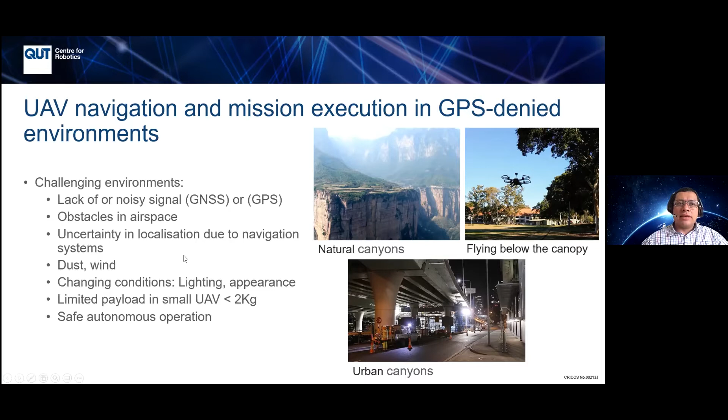So the proposed framework consists of hardware and software. So hardware, we have built multiple prototypes, which are based on a quadrotor frame. We also put an onboard computer and visual inertial sensors so that the UAV is able to localize in a GPS denied environment. Also, it's worth mentioning that we're aiming to build a sub 2 kilogram UAV,

because the sub 2 kilogram UAVs are within the very small RPA category, or the excluded category for CASA. CASA is the Civil Aviation Safety Authority in Australia, and they regulate the use of remotely piloted aircraft. So if you're using an aircraft which is under 2 kilograms, this falls under the excluded category, and it has some advantages, like, for example, not needing to get a remote pilot license, but you still have to comply with some regulations, like for example, registering your drone and registering yourself.

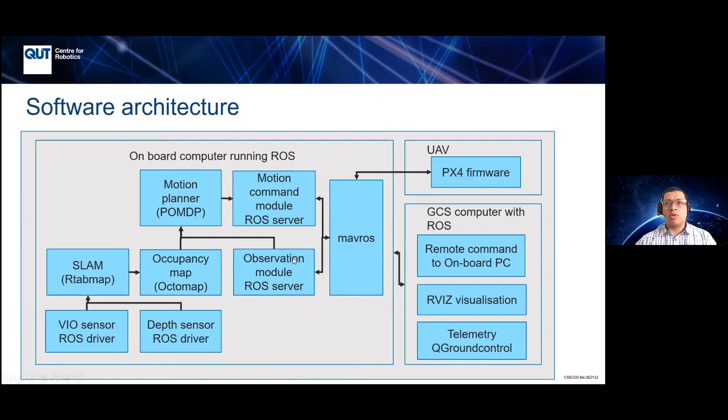So a good thing to mention here is that we're relying on an onboard computer for executing the mission, because if at any point in time we lost a connection, there's still the safety of running this modular system on board the computer and on board the UAV.

In order to develop this system, we need to start by testing first the localization of the system. So we use a Visual Inertial Odometry algorithm for this. And we start testing in an indoor environment. So QUT has a flight arena, a flight testing facility that allows us to test UAVs in a netted area, and also we have a motion capture system.

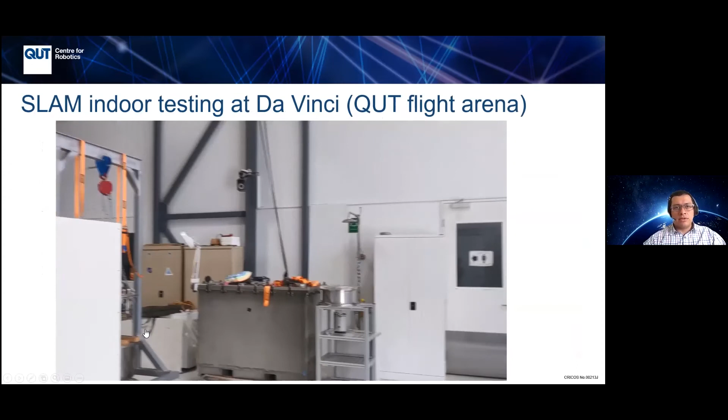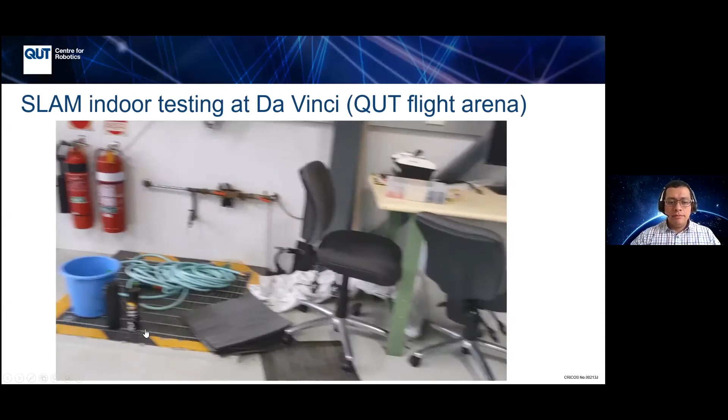Then the next test is to show how the map is built. So this is the place where we are building a map. So in this test, we're just doing a handheld mapping. And we're visualizing how the system is building that map.

In this visualization, this is fast forward. We're holding the UAV with our hands and mapping around. What you see there is just a 2D projection of the 3D occupancy. This is an occupancy grid. And you will see that at the end also, once it closes the loop, the algorithm does some corrections and it adjusts the map.

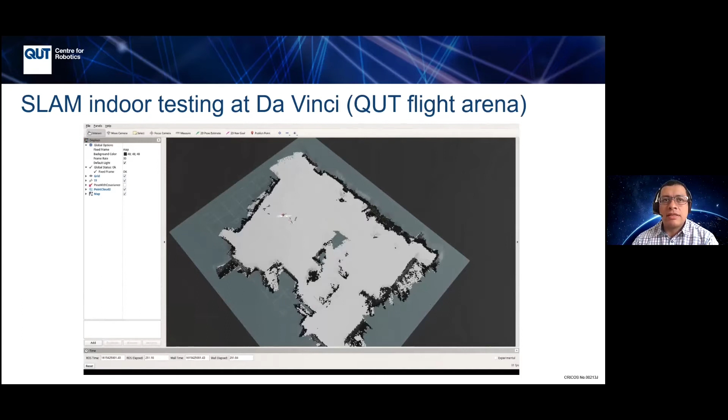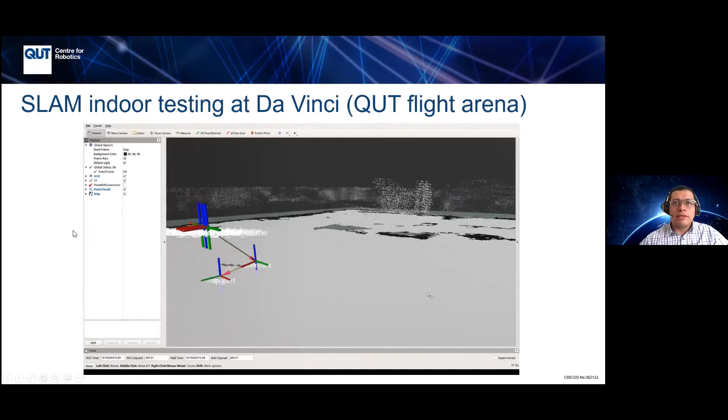So you see that it's adjusting the map. So we finished the mapping, but it's finding new loop closures. And you will see here the point cloud that is generated for the octomap, for the occupancy map as well, and the frames for the UAV, for the whole system, the important frames. So with this occupancy map, we can now generate a mission and also fly safely.

We have been testing, so QUT has a property which is called the Samford Ecological Research Facility. This allows us to test the system in an outdoor environment. So the idea of testing this is also for obstacle avoidance, for avoiding trees. So this also comes from the goal of the project, of an ARC Discovery project, which is to navigate safely below the canopy.

SERF is a place that is close to Brisbane city, but it requires planning. So you have to book the place for flight testing. You have to request permission to do flight operations. You have to submit a flight plan. There should be maps, a risk assessment also that needs to be approved before flying. It also requires logistics, booking or renting a QUT car, packing it up, loading, gazebo or marquee, table, chairs, and generator.

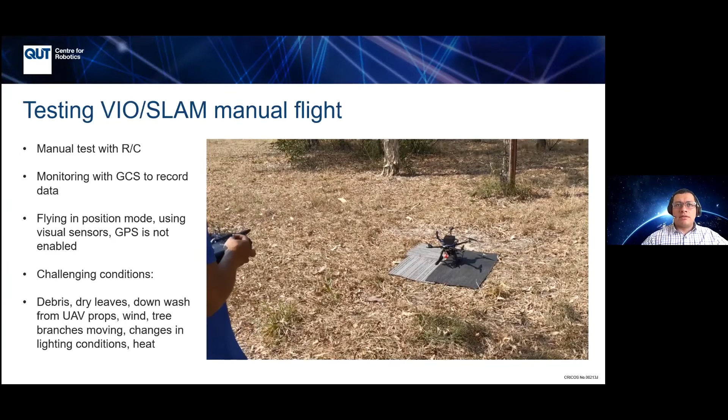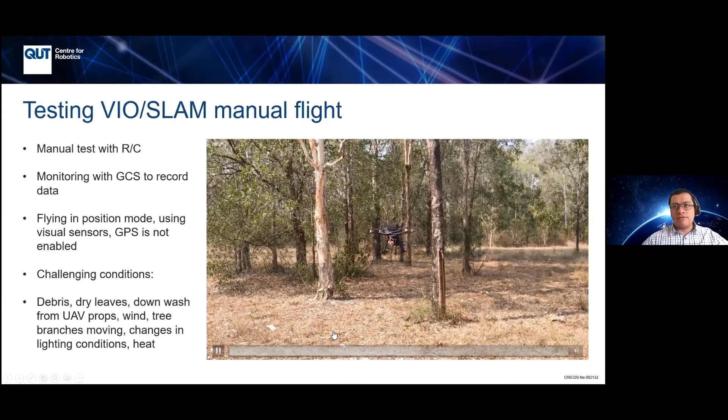And you will see that we have some challenging conditions. So in this case, there was a drought, and you will see a lot of debris and dry leaves, and there is downwash from the UAV. So sometimes this affects a lot. Basically it comes in front of the camera that is used for SLAM, and it affects a lot the performance of the SLAM algorithm.

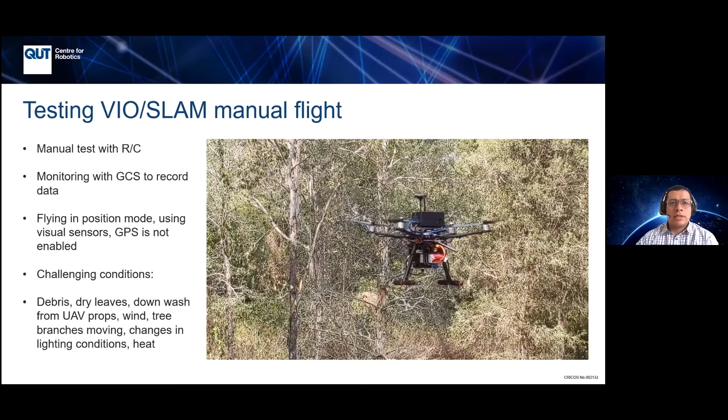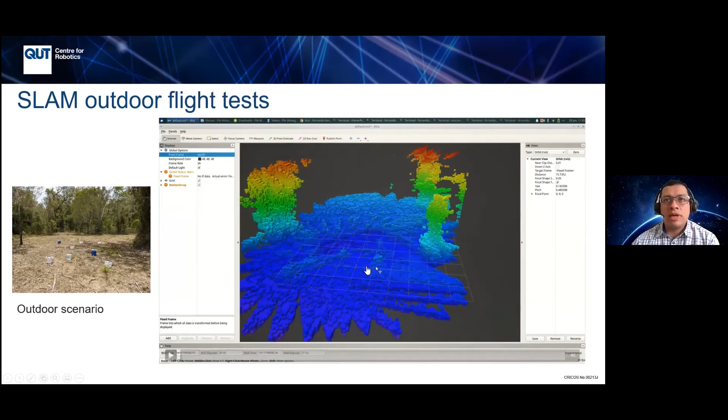Hey, Fernando. Yep. We have a couple of questions come through to me. Okay. Both of them are from Bilal. One question, which sensors have been used on the UAV to measure scene depth?

Thanks for the question. In these prototypes, we have used 3 different kinds of sensors. So we use the Intel D435 combined with the Intel T265. So this is depth; it uses a projected pattern. And we also used a time of flight camera, which is this one. It's now discontinued and maybe the company is not running anymore.

This sensor is a good sensor for indoor environments, but it has a very short range, only up to 4 meters. And we're currently using the ZED 2 camera, which allows us to have both visual inertial odometry and depth in the same sensor, but it requires an NVIDIA Jetson computer. So, yeah. Excellent.

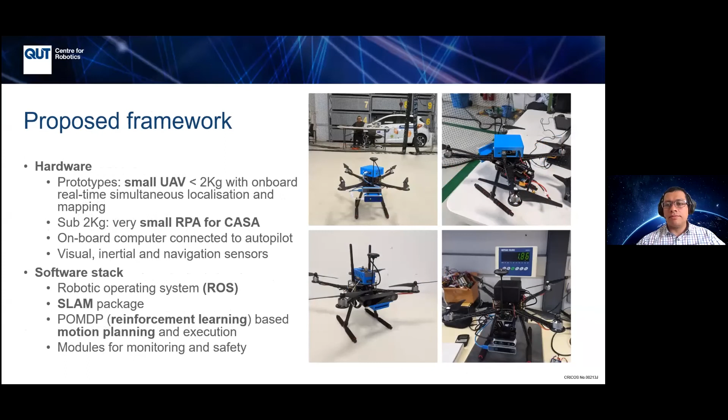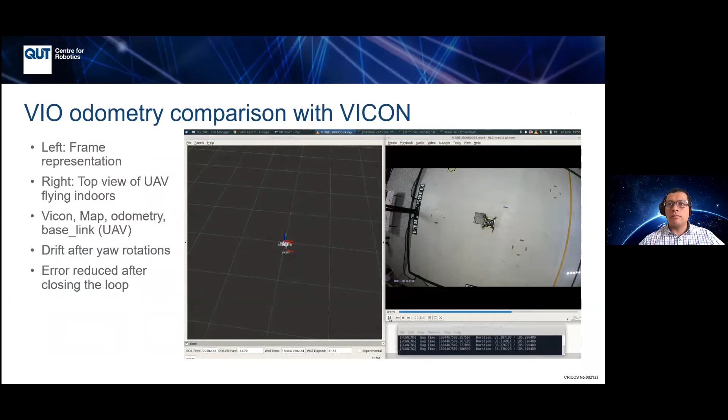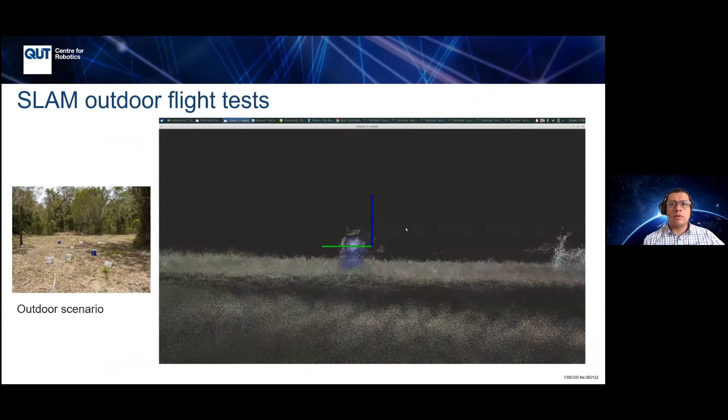The second question was, how is the depth uncertainty being used in the POMDP states? Yeah, thank you for the question. Let me just go back. So what we use, the depth sensor basically is used for the SLAM algorithm. The SLAM algorithm produces the occupancy map, and we use the occupancy map in the POMDP, so that's the relationship.

So we're constantly looking at the occupancy map in the POMDP, and we query the occupancy map to check for possible collisions. So the way that the POMDP works is that it has an internal simulator. It has the dynamics of the UAV. We model possible actions that the UAV can take, and then based on the actions it predicts where it's going to be and the outcome, if it's possible that there is a collision, looking at the octomap.

Excellent. Okay. So continuing. Thank you. Okay.

Continue with the framework. So we use PX4 firmware. We use MAVROS, which is the bridge between PX4 and ROS, and we also use Gazebo for simulation. Let me show you more the workflow that we use. So we model the problem as a POMDP. So we model the states, possible actions that the UAV can execute. For example, going forward, rolling left or right, going up and down, or changing orientation.

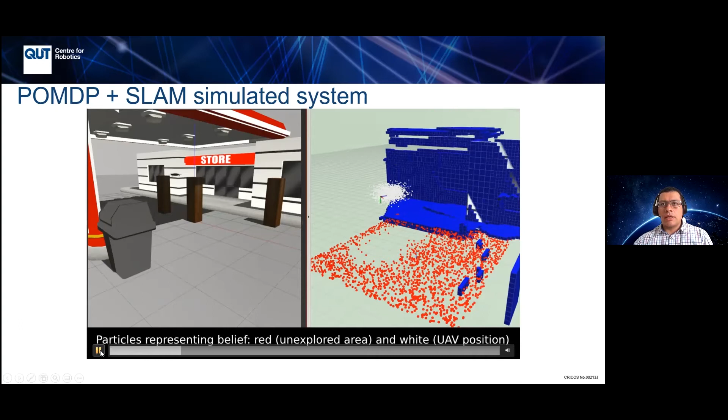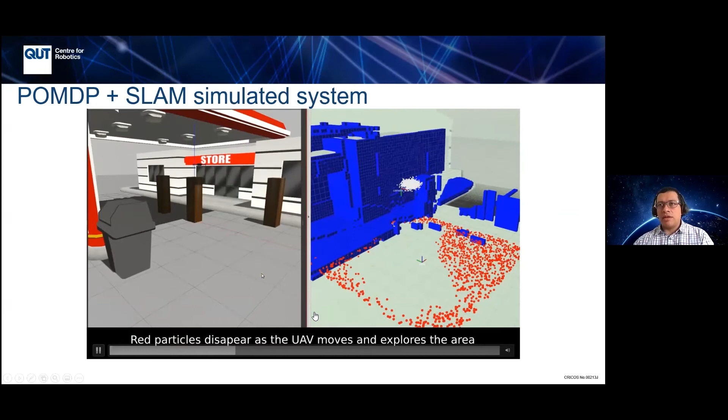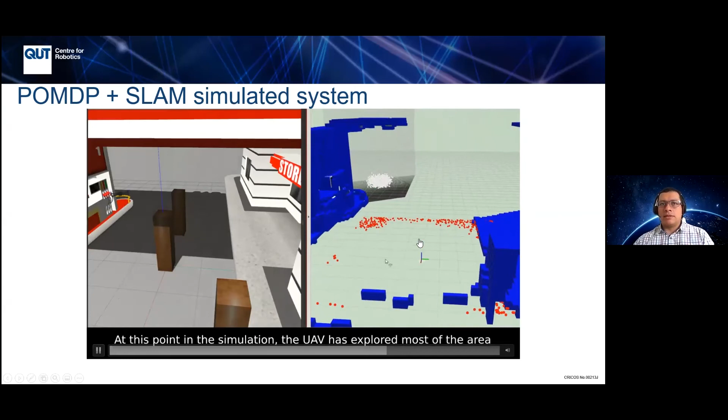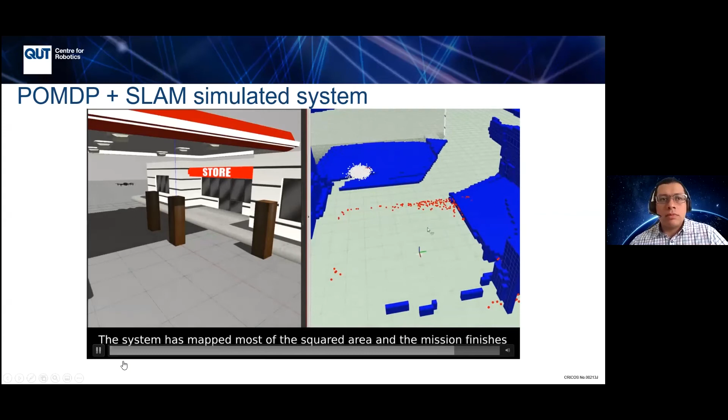So you will see that the red particles representing possible targets disappear as the UAV moves and explores the area, and also the occupancy map is being created. So let's fast forward. You will see that the UAV already has cleared out this space, but at the same time, it has mapped all this space. And it continues mapping. So this is the way that we simulate.

I'm conscious of time. So I'm gonna show you some applications that we have done of this platform. For teaching purposes, we developed a project for the EGH 455 unit, in which the students need to create a payload. So it's a payload that is independent from the UAV, but you can connect it to the UAV. And this payload is for monitoring environmental variables and also finding targets. So we put some targets around the flight area.

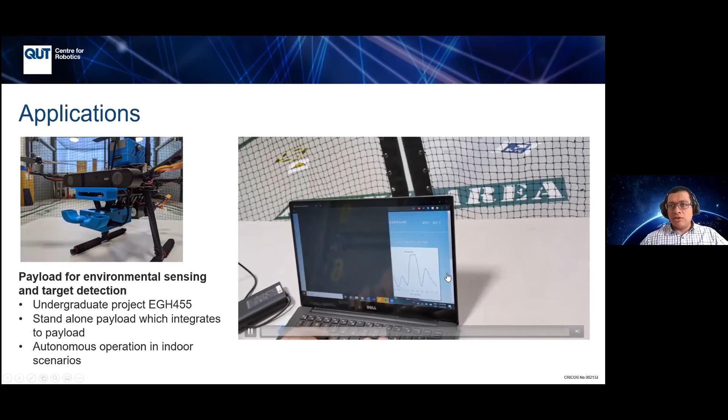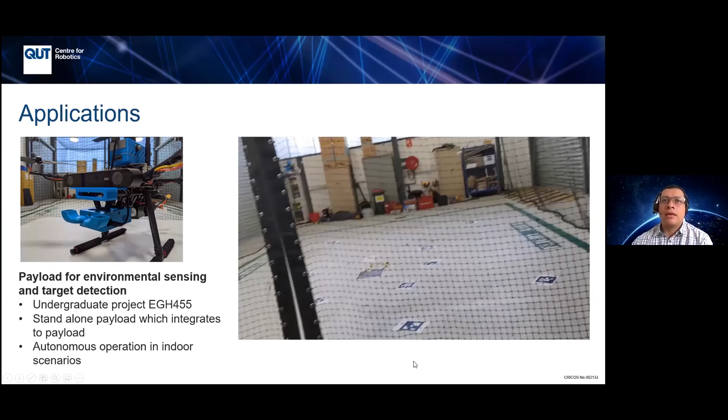And we program just a square pattern for the UAV to fly around while using the payload. So we have a ground control station. So the UAV is performing those waypoint navigations autonomously. But at the same time, the payload developed by the students is showing some environmental variables like detection of some gases, barometric pressure, and at the same time also the target detection.

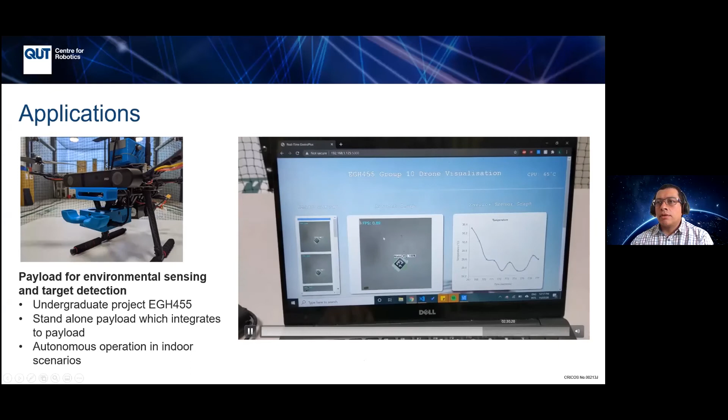At some point, the targets are being detected, and it's also showing the humidity, pressure, and some variables. So that's one of the applications of this framework. So if we continue.

Another application, Juan Sandino, a PhD student, has been working on people and object finding. We did a collaboration in which he used Visual Inertial Odometry for indoor localization for detecting a target. In this case, it's a person in a search and rescue scenario. The formulation of the search is also based on the POMDP and based on actions that the UAV can execute. So the UAV moves around the scenario, searching for targets.

But in this case, the map is not updated, it's just a fixed map. So we're using Octomap as well for the occupancy map. And we also, well, in this research, Juan also did some simulation.

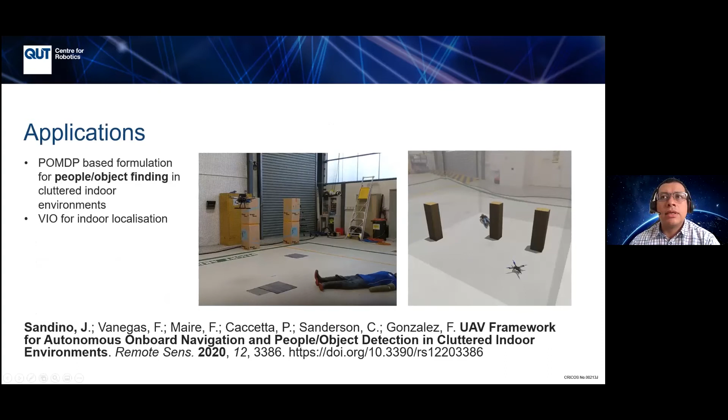Yeah, thanks a lot for the question. The map is changing, and the POMDP planning is changing in every step. That's why we use an online algorithm. So we start with basically what is in front of the UAV when it is on the ground. It does the first plan based on that, the first offline planning. The POMDP plans based on the first view of the map.

And then once there is a time step, it updates the map. So the POMDP plan basically is discarded and replanned every time, but we keep track of the belief state. Sorry. Does that respond to your question? Yeah, that's fine. Thanks for the answer.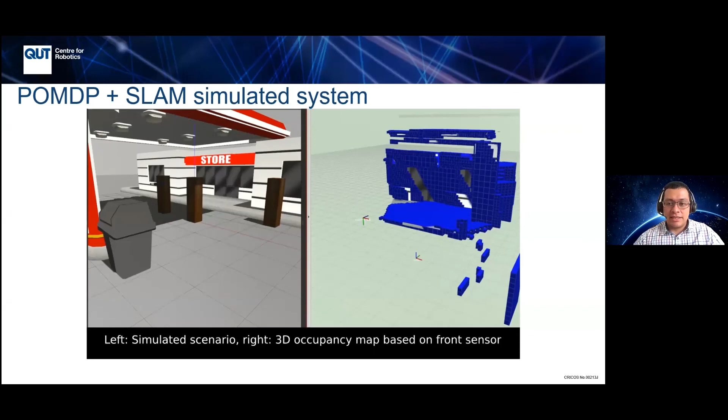A quick one, David, just to conclude on a nice note. Fernando, do you have any video of a nice crash of a UAV because of small branches or something in the environment? And if you don't, may I suggest you actually do some and then use that as a motivation at the start of your talk? That would be, I think, very effective.

Yeah, thanks. We don't have a crash video per se. Just ask Felipe, he has a bunch of spare UAVs. Just use one of the old ones and crash it. But we do have some drifts, with the UAV drifting away, not that much, but we had to cancel. We had to basically take it down through the remote control, force landing it.